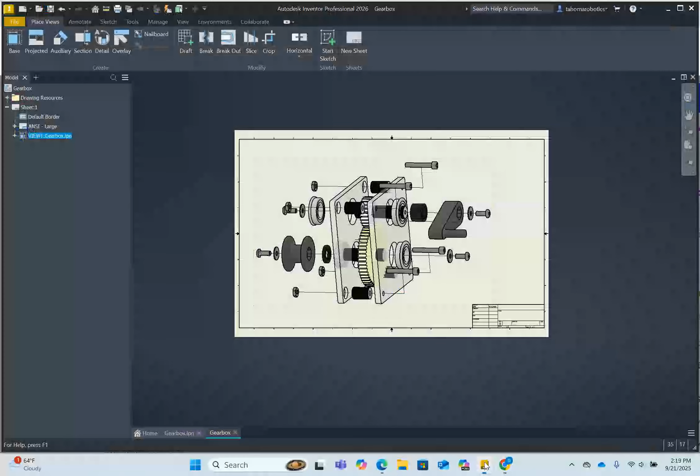Now that we have the snapshot view placed into the drawing, we can create bubbles and a parts list. It looks like it's just a little bit too large. It doesn't look like I have a lot of space to put a parts list, so I'm going to reduce the scale back to 2, and maybe move it out of the way.

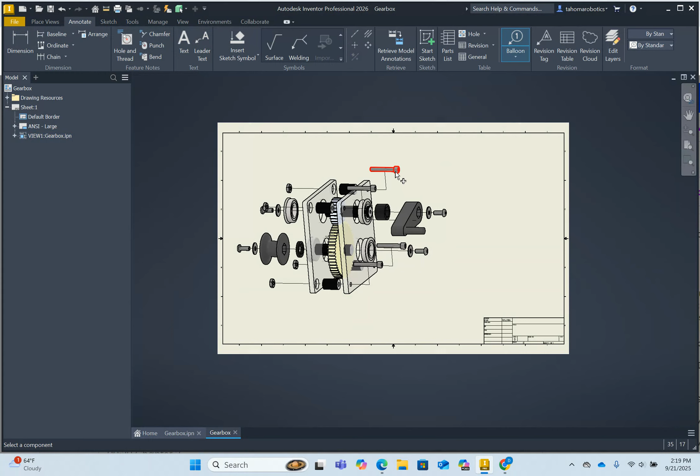So under the Annotate tab, there's a balloon feature, and we're just going to click here. The first time you click the balloon and you click on a part, it wants to know the source, and that's basically the gearbox assembly. So we're just going to go OK.

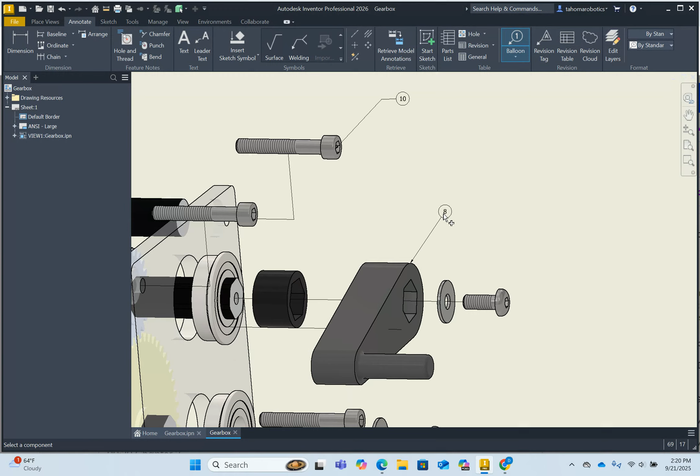And then you can create these balloons. If you click once, it makes a joint in the little arrow, and then you can click again. If you double click, it places that. I personally like where you go out and it has a little bend. It is not necessary - you can just have it go straight out if you double click. So whatever you prefer.

Now for time, I'm not going to put the little bend. You can do it as you would like. You do not need to do every single washer, because the parts list is going to tell us that there are 4 washers, and someone looking at the exploded view could see that there's 4 washers and they're all the same, so you only need to label one of them - you only need to label unique parts.

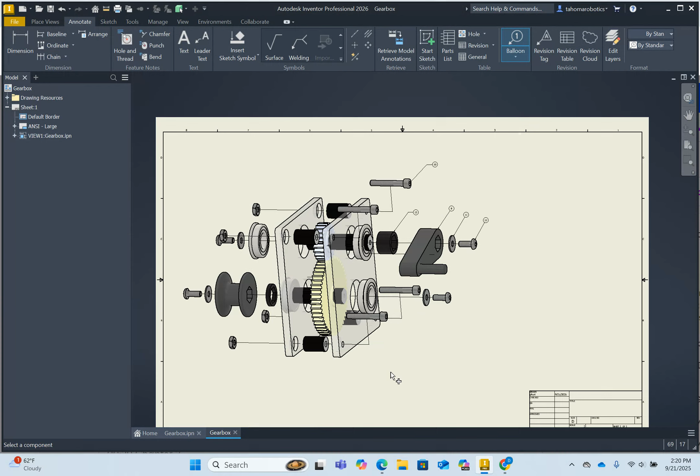Again, a single click, you can move over and make a bend, and then double click. So in short, we want to label each unique part, and sometimes you don't have a lot of space to put the little bubbles. You want to be careful - you don't want a bunch of lines crossing each other, and you want to make it clear for the person who would be assembling it, or clear for the reader.

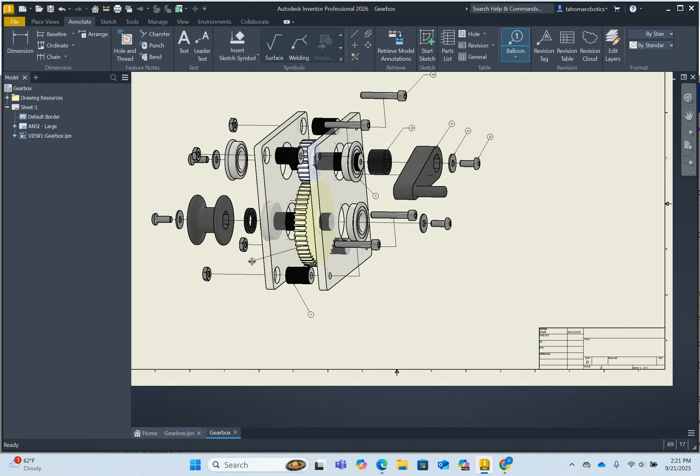So this one is a little bit difficult because of where the gear is placed. Maybe we could put it here, maybe we can put it over here. I think I'm going to put it on that side, but I didn't like the arrow coming from this side, so I'm going to go back to balloon and click over here on this side and go here.

We need to get the nuts labeled, the spool. We don't need to do another nut or another washer or another bearing, although it might be cleaner to label this bearing instead of this one. It doesn't hurt to label something twice - like this is a bearing, but it's a different view, an angle of this bearing, so it wouldn't hurt to click and do this. But it isn't necessary to do that for every single one.

And so once you have every unique part labeled, then we can create a parts list. It looks like the only part I don't have is the axle and then the spacer. And again, you can always go back and add them if you miss one. I think I have them all, but I am not positive.

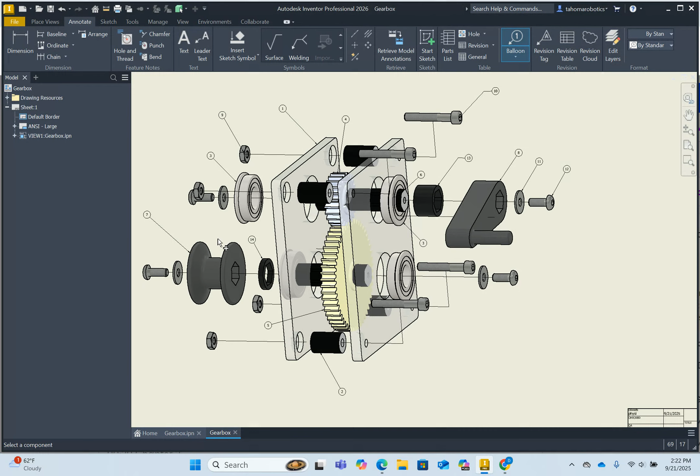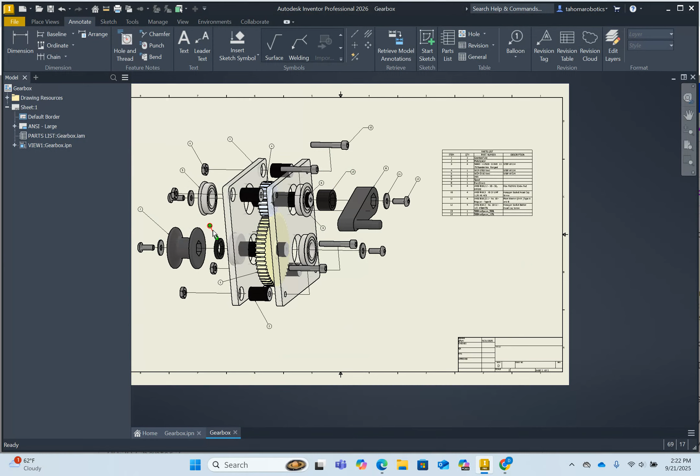So now that I have those labeled, we can create a parts list. And so for a parts list, we can click here. We're going to select what we want to make the parts list of, and then you can go OK, and click, and basically it will tell you the item number that is pulled from the bubbles and the quantity, and the part number is actually saved as the name that you saved the part. That's the way Inventor works.

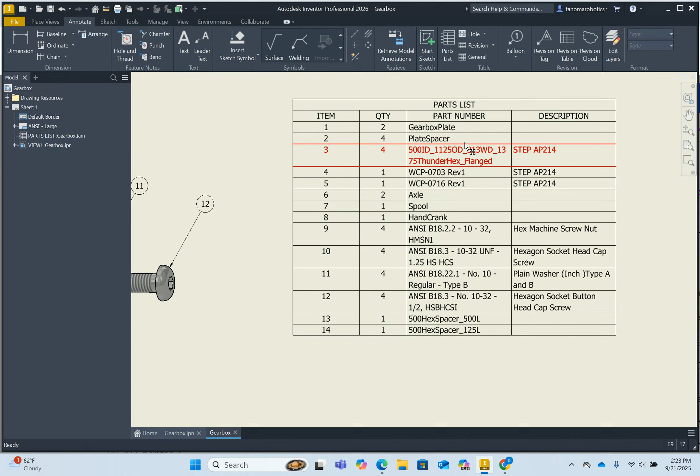Now if you look here, these are actually the bearings, and there's a couple of ways to change this. If you wanted to double click here, we can actually change what is in the list. I think it's under the column chooser. So you can add and remove - like maybe I don't want the description and maybe I want some additional information. And it appears that in the part itself, when it was designed, the part number was put under this instead of something else.

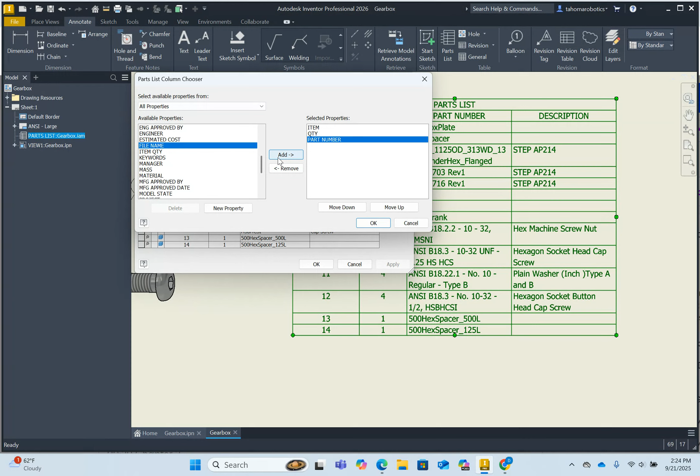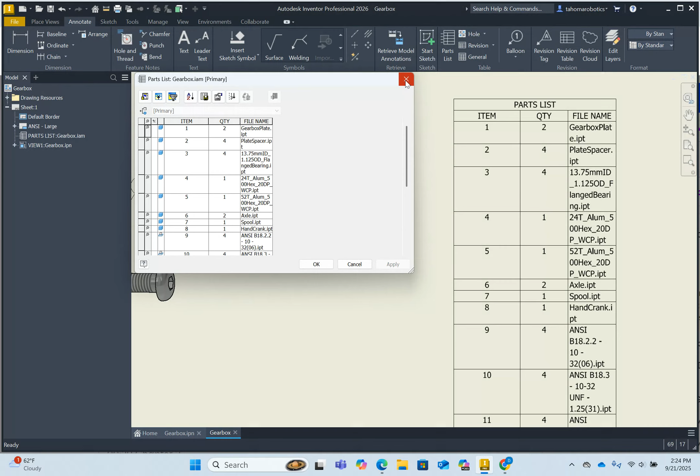And so you may want to put the file name, and we can add file name and remove the part number. And if we go OK there and apply, it will actually just give you the file name itself, and sometimes that can be more useful. Then we can close this.

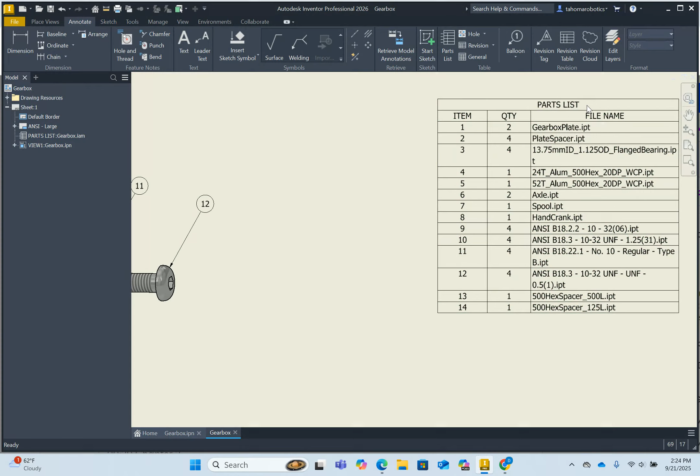Now, looks like I need to stretch this out a little bit. Maybe I won't have that one as wide, but I definitely want this a little wider. And then I'm going to move this over. So you can change the width of everything so it fits, and then you can move it where you would like. If I hit escape, I think I can grab the whole thing and move it. I'm struggling here - okay, that didn't move the whole thing. Okay, there we go, now I moved the whole thing. So you can move it.

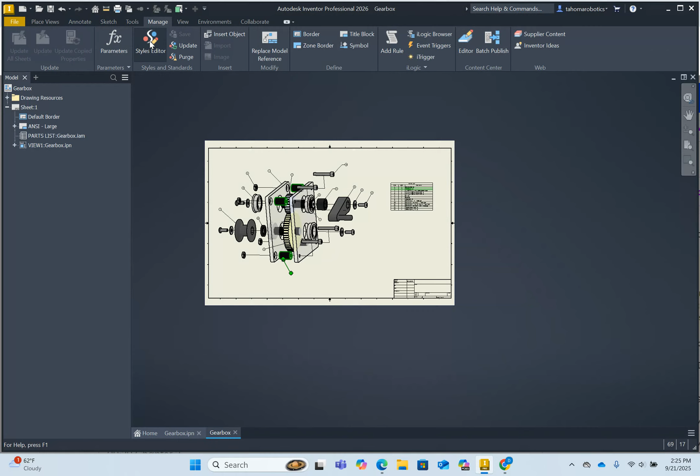You can also see it looks like the fonts are a little bit small. And so just like we've done in other drawings, you can go into the styles editor and change the size of the notes. And we should be able to change the size of the bubbles as well. I'm not sure if this changes the size of the bubbles - we will see. It does. So if you change the note text size, it changes all the text and the bubble sizes, just to make them a little easier for the reader.

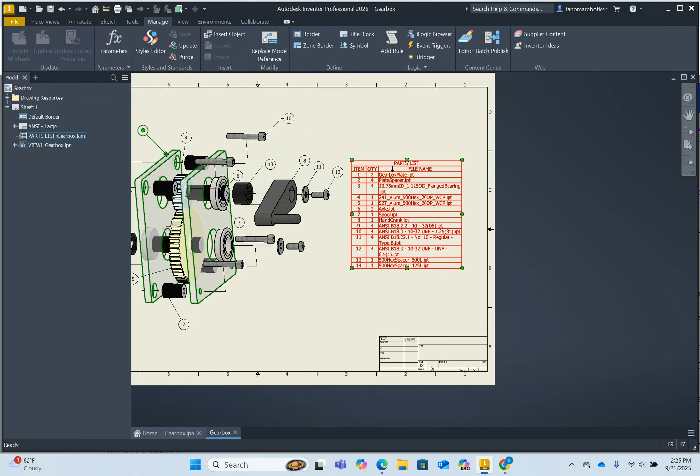So once it all looks good, you can take a screenshot and put it in your assignment. And then you can save this, and you can save it as the Gearbox. Again, it's not going to overwrite the other files named Gearbox, because this is a Gearbox drawing, not an assembly or a presentation.